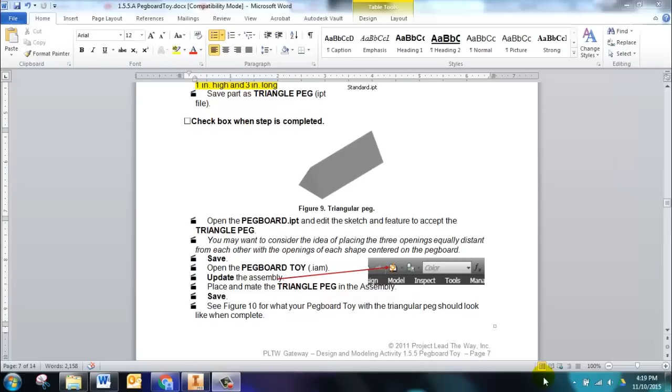But anyway, welcome back. Let's finish activity 1.5.5, specifically with the creation of the mallet. The mallet head must be right here, 1 3/4 inch diameter by 3 inches long.

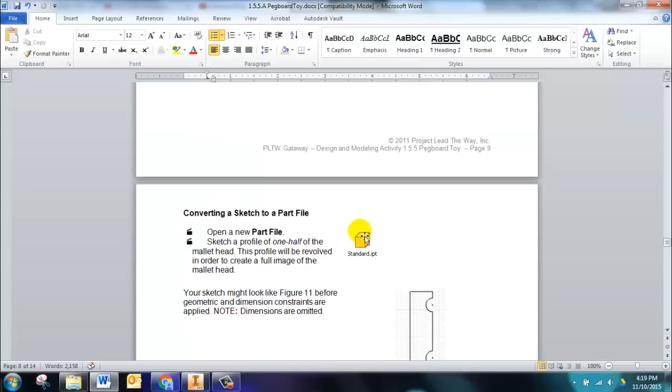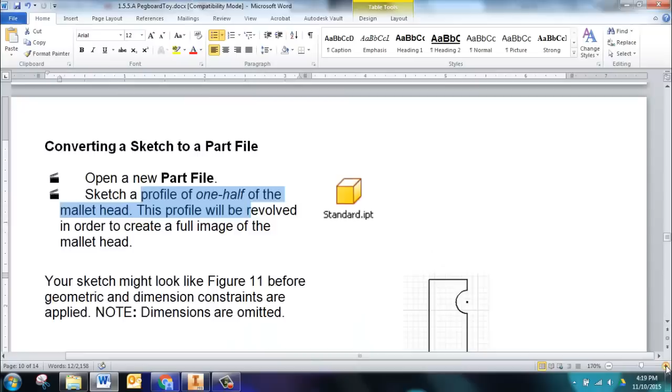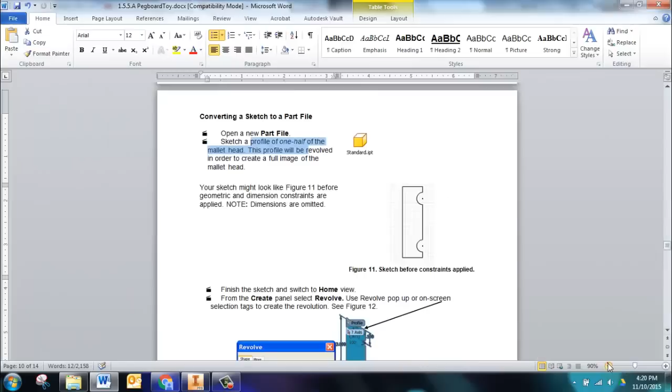Let's look ahead. They give you a chance to draw a mallet head, and if you'd like to do that on your own paper, you may. But let's look at what they've created. They start by creating a profile of half of the mallet head, and here you see what it looks like. They do have some dimensions, and if you zoom in really close you can see these numbers. It's 3 inches this way. It says 0.875, which happens to be half of 1.75. So you don't have to do a whole lot of math, you just have to look at the pictures and zoom in really close.

But let's look at drawing this shape. So in Inventor, let's close that. I'm going to create a new part. I'm still in my Pegboard project. It's a new part, and I'm going to go ahead and create a sketch on the XY plane.

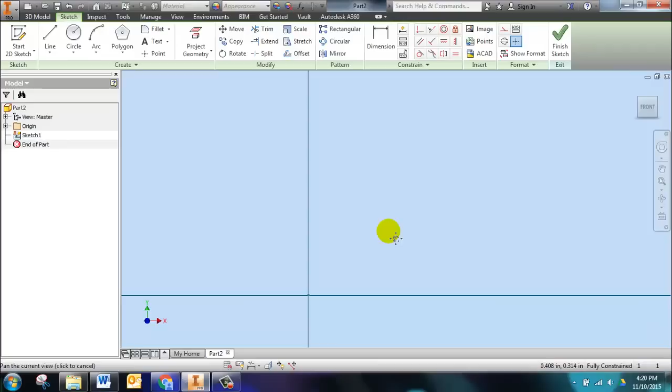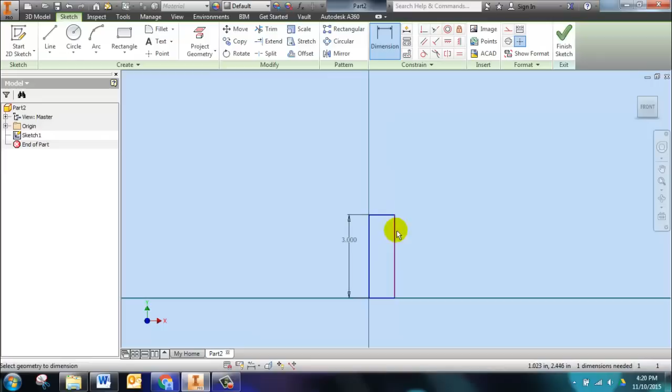Now, once again, I'm way too lazy to draw a bunch of lines, so I'm going to draw a rectangle that is close to 3 inches tall. I'm going to zoom out. Somewhere in this neighborhood. And I'm going to go ahead and dimension that height. It should be 3. And remember that other number, this distance, is supposed to be half of 1.75. So I can type in 1.75 divided by 2, and it'll do the math for me.

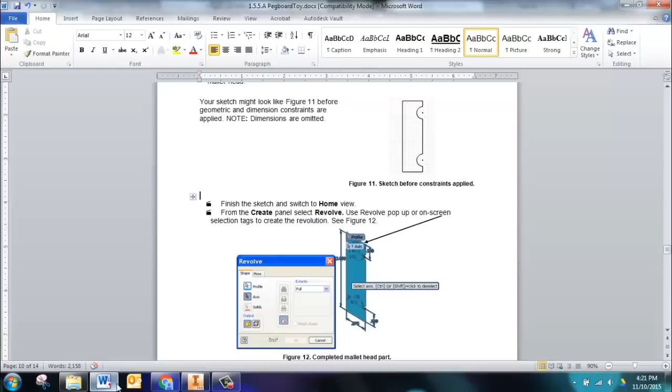Now let's look at their shape. They have a couple of arcs here, and I'm going to tell you right now, students, I don't like to draw arcs. I find them difficult and challenging. I would much rather draw a circle and place the circle here and here, and then I'll dimension so that they're both the same size. Let's make them 0.5. Okay, but I also need to locate it, so I need to go from center point to edge, and we'll say 0.5, and I need to locate this one to here.

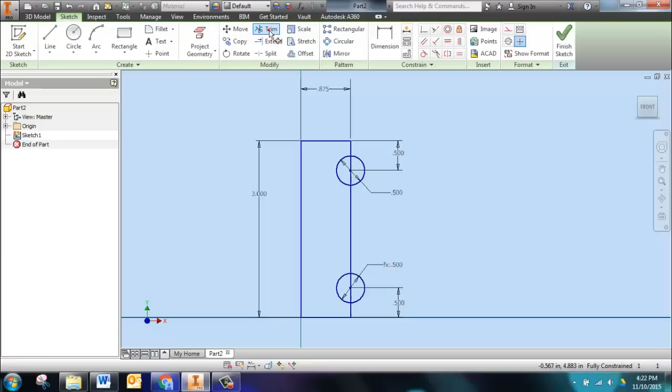Now there are a number of different sketching tools that you can use to modify and trick up your mallet. We do need to trim away this part of the circle, so I'm going to use the trim tool to click on here and this little line in the middle, here and here. Okay, so we have a shape that now resembles... in fact, let me delete the dimensions so you can see the shape a little bit better. Okay, I need the dimensions, so I'm going to put them back, but I wanted you to see the shape a little bit better.

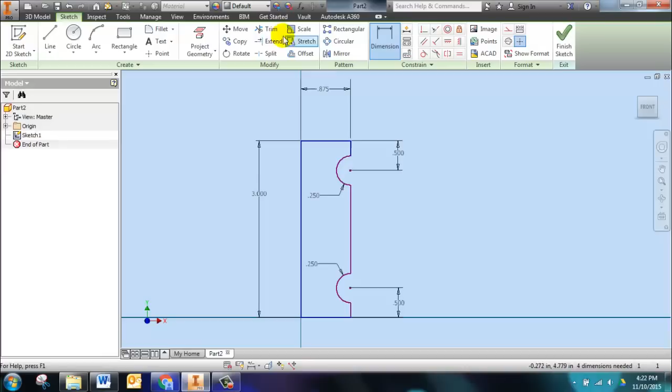You can do some other things if you want to round some corners off, but I'll show you that after we're done with this part. So let's go ahead and finish the sketch and zoom out. Now, the difference here is that we're not going to extrude our profile because that'll look silly. That doesn't look like our mallet. The mallet will be revolved.

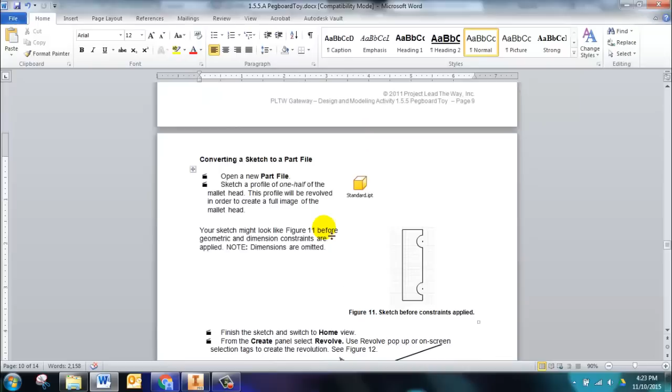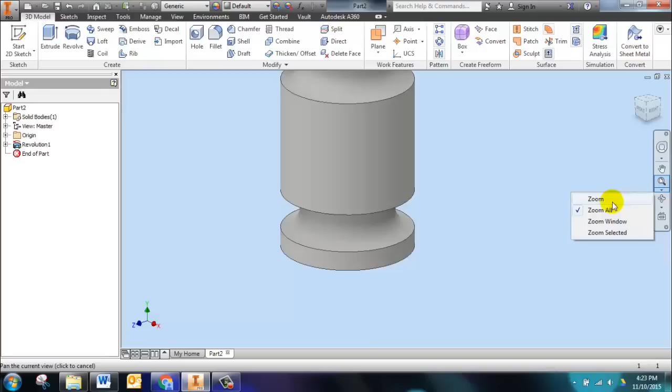And we do that by clicking on Revolve. So right up here, instead of extrude, no, yes, we do Revolve. It automatically chooses the profile because it's the only one there, and we have to choose the axis. Well, we want this back edge. And then say OK. Now, it may look a little basic. Let me tumble this over a little bit. And I don't like all the hard corners, so let me introduce you to a command called fillet. You'll see it right here. You have the option of giving it a radius and then clicking on edges. Now, I'm not going to change the radius, I just want to look and see what it does.

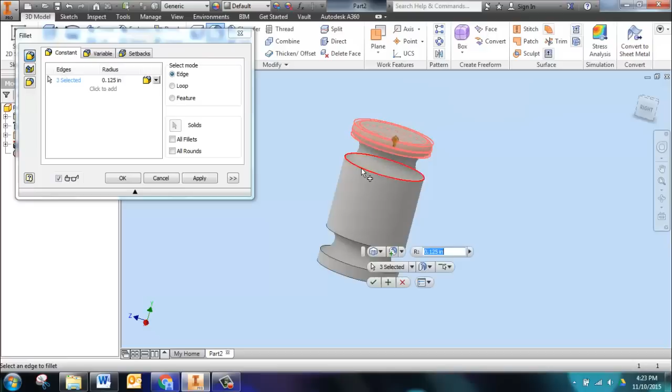And I can click on all of these. When I'm done, I just click the green check mark. Now it's nice and rounded over. It looks much more attractive.

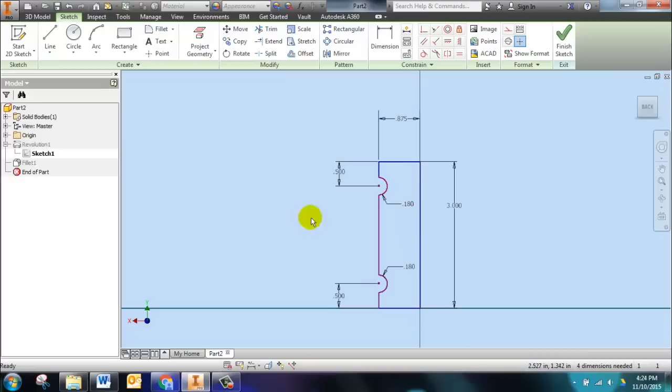Remember, I can always go back to the sketch. Click here and go to my sketch. If I don't like it, maybe I think these are too big, I can make them 0.17 or 0.18. Okay, so you can modify things after the fact also. Say OK, and it updates our shape, makes it a little nicer.

Alright, so I'm going to go ahead and save this. I'm not done with it yet, but I'm going to save it so I don't forget. This will be the mallet head.

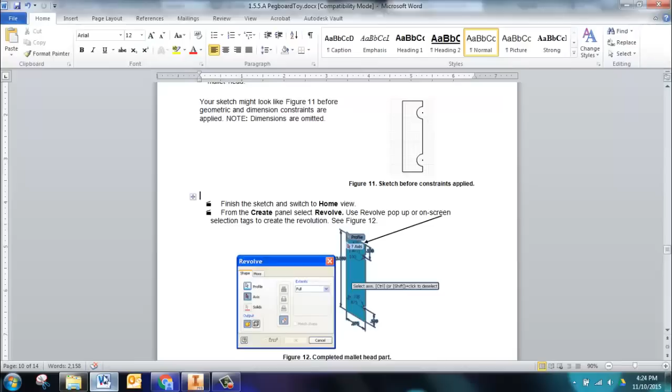What we need to do next is create a hole that goes in it for the handle. Okay, so we have to create that hole right there. See it? To do that, I have to create an offset sketch plane. A sketch plane that's not one of the sketch planes that we already have. So let's look at that.

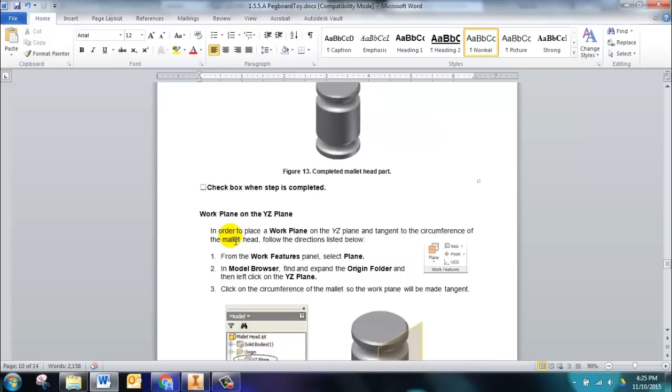Let's read this first. It tells us to open or expand the origin folder in the model browser and then left click on the YZ plane. Okay.

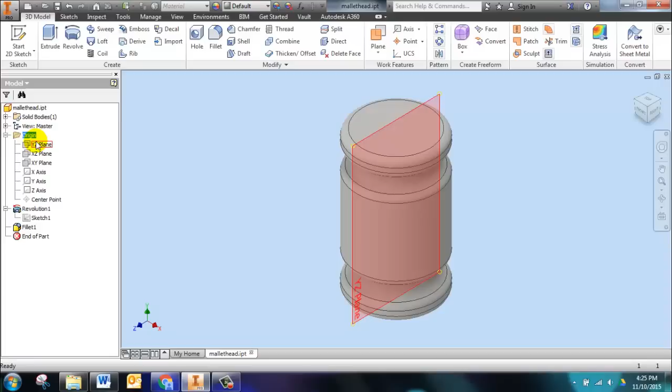Well, let's do that. In here I'm going to open or expand this, find the YZ plane and click on it, left click on it. Then I'm going to come up here and click on this little drop down arrow and say tangent to surface parallel to plane. And then I click on this round surface. That's it. I now have a sketch plane, or a work plane, that I can choose as a sketch plane.

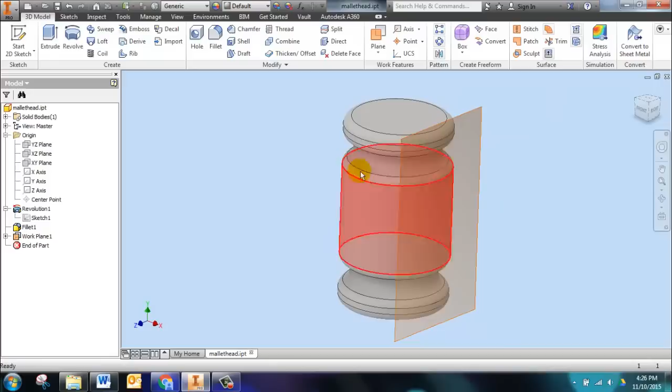So let's look at that. 2D sketch, choose that plane. I'm ready to put a hole right here. So I'm going to use a point and grab that center point right there. I don't even have to dimension it because it's locked on that center point. So I can say finish sketch and do hole.

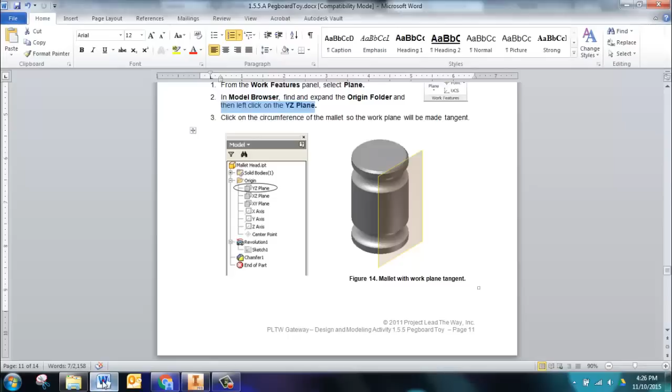Now let's pay attention here because they have some notes that we have to follow. So let's scroll down. Look here, the specifications for this hole are 0.875 inch drill depth, 0.625 inch tap depth, and then 5/8 hole size. Alright, so here's the deal.

Screws have standards, and we call those the ANSI standards. Tap depth is how deep the screw threads go, and they don't usually go as deep as the hole. So here's what we do. We're going to look for these same words on this picture, and you see how they have them pictured here.

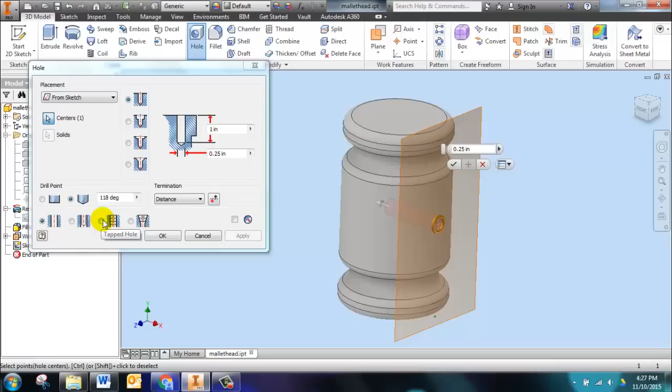So in here, I'm going to go up here. Whoops, why didn't it switch? There it goes. So over here, I'm going to click on this button for tapped hole. Give it a second. ANSI Unified. Size was 0.625. Right? Okay, let's double check that. Yeah, 5/8 is 0.625, students.

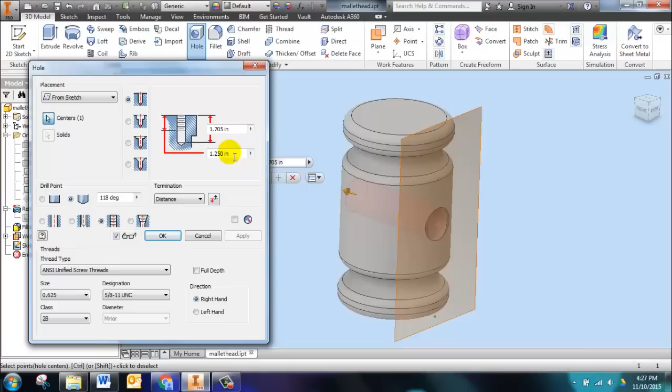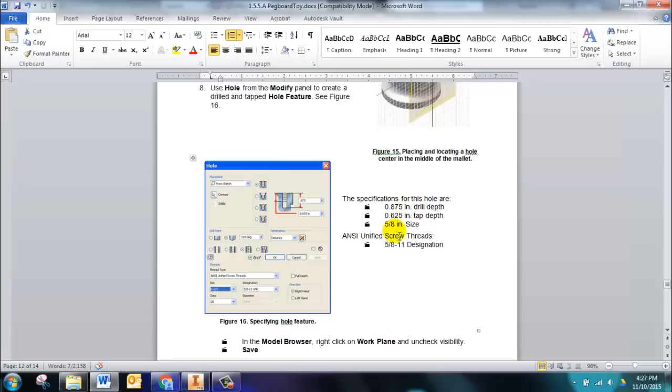The tap depth, which is this first number here, was 0.625 also. And then the hole depth was 0.875. I'm going to double check that. Yeah, hole depth is 0.875, tap depth 0.625. And the diameter of the hole is 0.625.

Alright, so we say OK, and we get a hole with lovely little threads. It's just a virtual representation of threads. We didn't really cut threads into the part.

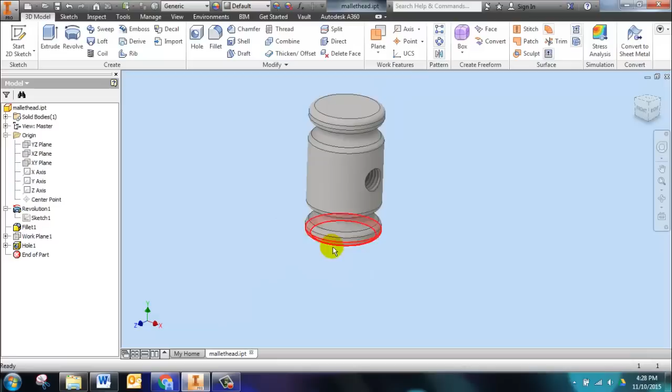Now, you know how I feel about sketch planes or work planes. So I'm going to come over here, right click, and turn that off. Save this as the mallet head, and let's move on to the mallet handle.